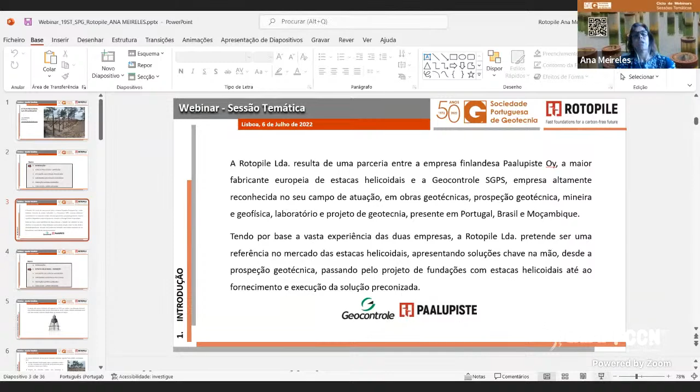Boa tarde a todos. A Rotopile é uma empresa que resulta da parceria desta empresa finlandesa, de onde são oriundos o Tero e o Ilkka, da Paalupiste, que é a maior fabricante europeia de estacas helicoidais, e da Geocontrole SGPS, uma empresa altamente reconhecida no seu campo de atuação em obras de geotecnia, prospecção geotécnica, mineira e geofísica, tal como laboratório e projetos de geotecnia, presente em Portugal, Brasil e Moçambique.

Tendo por base a experiência destas duas empresas, a Rotopile pretende ser uma referência no mercado das estacas helicoidais, apresentando a solução chave na mão, desde a prospecção geotécnica, passando pelo projeto, até à sua execução, fabricação e execução do projeto. Neste momento estamos em fase de estudo para uma fábrica, ter uma fábrica aqui perto de Lisboa, que depois nos vai fornecer um material não só para Portugal, como para a Europa ou outras zonas.

Começamos por fazer a definição mais ou menos do que é uma estaca helicoidal. A estaca helicoidal foi patenteada em 1833 em Londres pelo Alexander Mitchell, cuja primeira utilização foi feita para a amarração dos navios, e a primeira construção foi feita para o farol de Maplin Sands, no estuário do Tamisa. Portanto, isto não é uma tecnologia nova, é nova ou desconhecida aqui em Portugal, mas é uma tecnologia já bastante antiga.

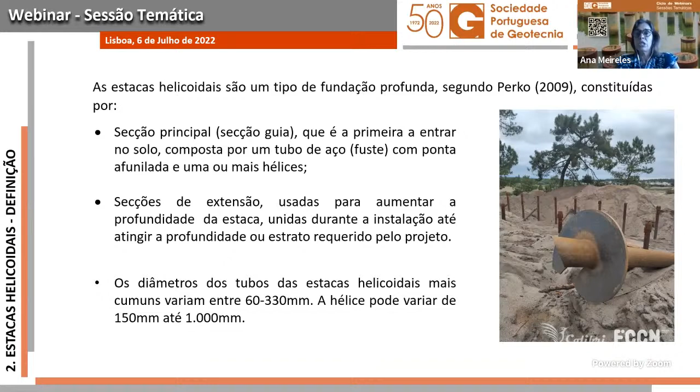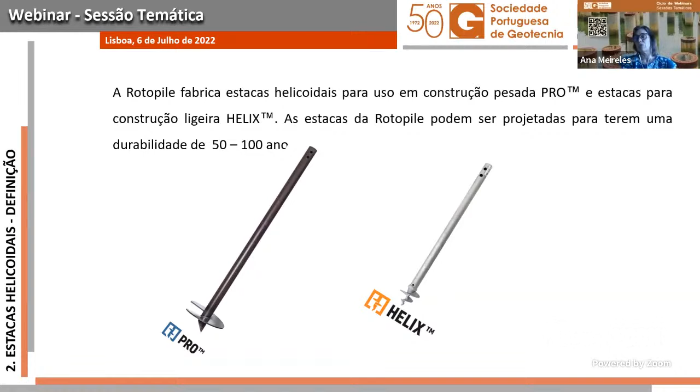A Rotopile fabrica 2 tipos de estacas: as estacas para a construção pesada, que são as tipo Pro, e as estacas para a construção ligeira, que são as tipo Helix, como temos o exemplo nestas duas fotografias. As estacas da Rotopile podem ser projetadas para terem uma durabilidade entre 50 a 100 anos, conforme exija o projeto.

No que toca às aplicações das estacas helicoidais, estas podem resistir a cargas à compressão, à tração ou laterais, e podem ser inclusivamente instaladas em qualquer ângulo para melhorar a sua capacidade de carga nas cargas inclinadas, e podem ser utilizadas com mais frequência em pequenas construções, como terraços, vedações, portões, escadas, docas, casas pequenas, garagens, painéis solares, passadiços e sinais de trânsito. Em grandes construções temos o caso, por exemplo, de casas, pavilhões desportivos, postes de alta tensão, barreiras sonoras, pontes, pórticos, mupis, coberturas insufláveis e lajes de betão, na fundação e no reforço das lajes de betão.

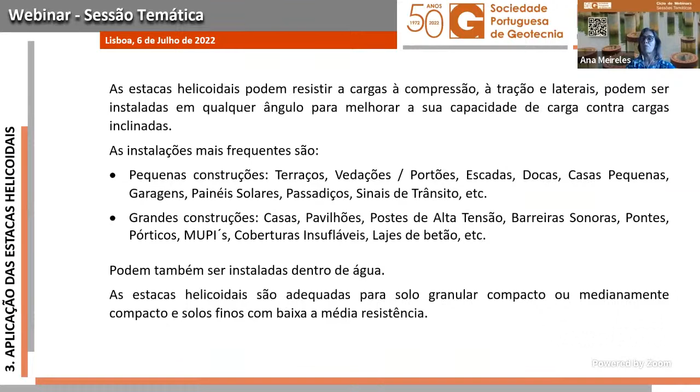Podem também ser instaladas dentro d'água, e as estacas helicoidais são adequadas, na sua maioria das vezes, para solos granulares compactos ou medianamente compactos e solos finos com baixa a média resistência.

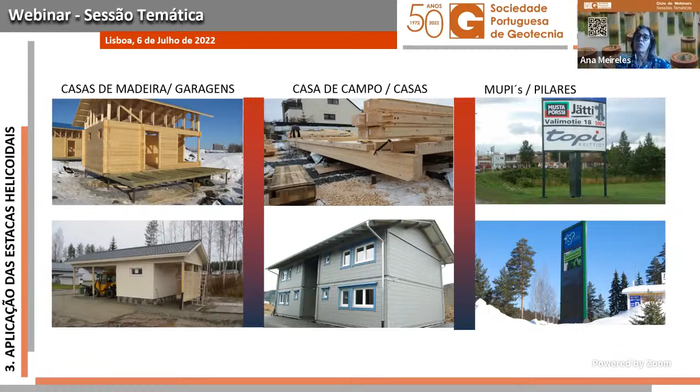As casas de madeira e garagens, casas de campo, casas com mais do que um piso, inclusivamente num seminário que houve aqui há uns meses no Canadá, uma das apresentações que foi feita foi na construção de um edifício com cerca de 20 andares, uns mupis e pilares.

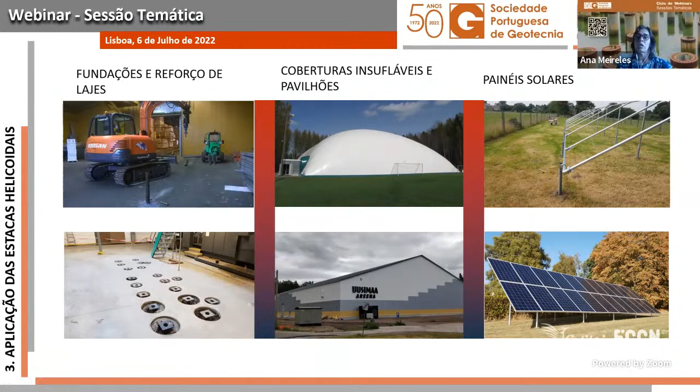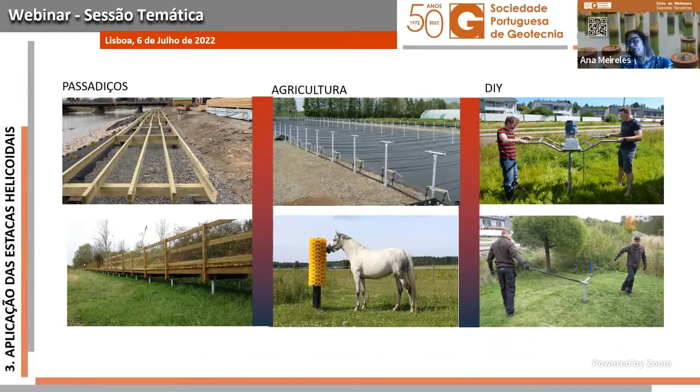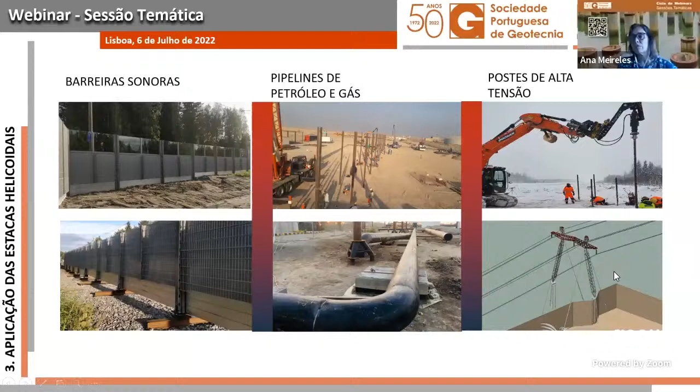As vantagens que nós conseguimos obter com este tipo de solução é a capacidade de carga, que pode ser estimada por meio da correlação entre o torque de instalação, e que é confirmado à medida que nós executamos a estaca. Portanto, à medida que nós estamos a executar a estaca, nós estamos a poder confirmar pelos dados que os manómetros nos dão, de que realmente estamos a chegar ao nível que pretendemos.

Podem ser removidas para aplicações temporárias e, inclusivamente, reaproveitadas. Se não forem reaproveitadas para outra obra, podem ser recicladas. São mais fáceis de serem transportadas para locais de difícil acesso, podem ser instaladas em terrenos com um elevado nível freático sem haver necessidade de se fazer um rebaixamento do mesmo, e aqui temos uma boa relação custo-benefício, já que a rapidez de execução é bastante grande. Não se utiliza caldas de cimento para injetar, podendo utilizar, mas a utilização básica é realmente não ser necessária a utilização de caldas de cimento nem betão.

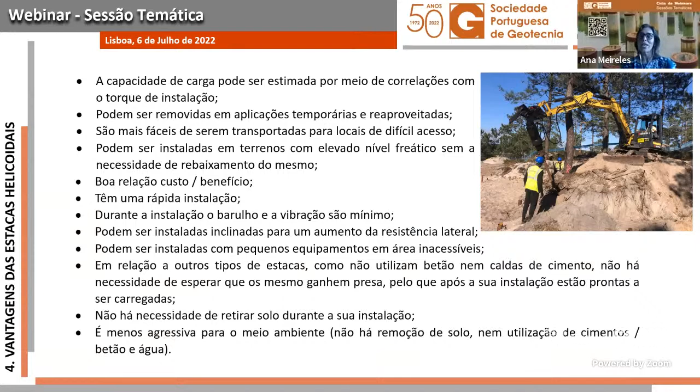No que diz respeito à proteção contra a corrosão, não há uma norma europeia específica para as estacas helicoidais, mas usam-se normas como a NP EN 14.199 de 2019, de execução de obras geotécnicas para microestacas, e o Eurocódigo 3 de Design of Steel Structure, parte 5, Piling, que é a norma europeia 1993/5 de 2007.

Complementarmente a isto, utilizamos o guia das estacas helicoidais, Helical Piles - A Practical Guide to Design and Installation, de Perko, como podemos ver a capa nesta fotografia, e ainda temos como referência possivelmente a única norma que tem um anexo inteiramente dedicado às estacas helicoidais, que é a BS 8004 de 2015.

Mas no que se refere à durabilidade, esta norma encaminha na mesma para a norma EN 1993/5 de 2007.

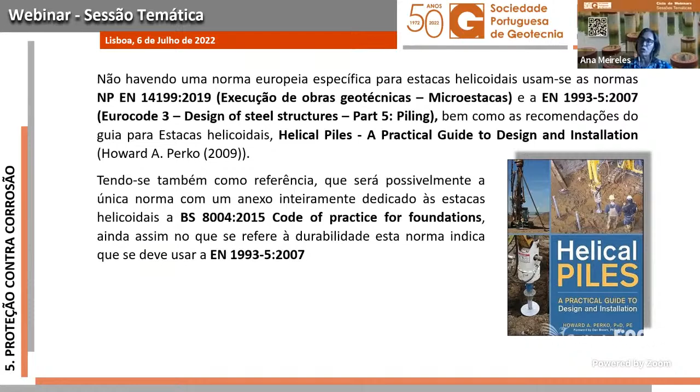Portanto, de acordo com a norma NP EN 14.199 de 2019, o elemento de proteção contra a corrosão dos elementos em aço das microestacas deve ter em conta a agressividade do meio, a água subterrânea, o solo, as correntes parasitas, o tipo de microestaca, o tipo de carga, se há tração ou compressão, o tipo de aço e a vida útil para que deve ser projetado.

Portanto, a estrutura tem uma vida útil e as fundações devem, portanto, seguir essa premissa. A proteção contra a corrosão deve consistir num eficiente recobrimento com calda, argamassa ou betão, e aqui é muito importante dizer, ou numa espessura de aço de sacrifício para a corrosão, ou precauções específicas.

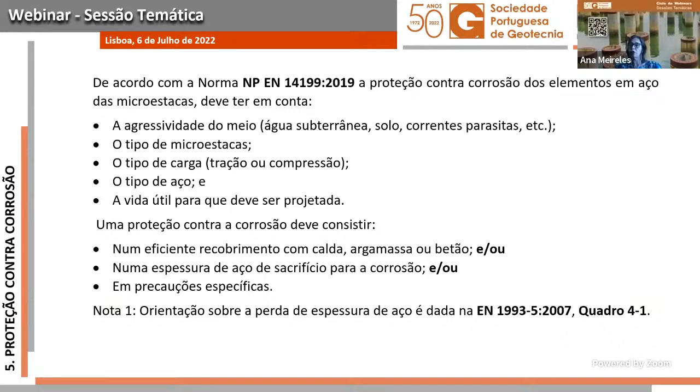A nota 1 nesta norma diz que a orientação sobre a perda de espessura do aço é dada pela norma 1993/5 de 2007, no quadro 4.1, a que já referi anteriormente, e a nota 2 diz que se podem especificar precauções acrescidas: a utilização de cimentos especiais, a utilização do tipo de aço adequado, a utilização de colunas de revestimento permanente ou encamisamento e a utilização de revestimentos de superfície.

Como eu já tinha dito anteriormente, a norma que vamos utilizar para cumprir com os requisitos da proteção contra a corrosão será a norma 1993/5 de 2007, que nos vai dar a referência quanto à perda de espessura do aço devido à corrosão, de acordo com os seguintes quadros que aqui estão explicitados. Aqui está o título dos quadros.

No quadro 4.1 está o valor recomendado para a perda de espessura em milímetros devido à corrosão para as estacas e estacas prancha em solo, com ou sem água subterrânea, e no quadro 4.2 o valor recomendado para a perda de espessura em milímetros devido à corrosão para estacas e estacas prancha em água doce ou salgada.

No caso do quadro 4.1, que é em solos, com água ou sem água, conseguimos perceber que, por exemplo, se tivermos um projeto que tem que ter uma durabilidade de 100 anos, a nossa estaca helicoidal, se for instalada num solo natural não perturbado - areia, argila, lodo ou xisto - o tubo terá que ter uma subespessura de 1,2 milímetros. Esta subespessura aplica-se também à hélice.

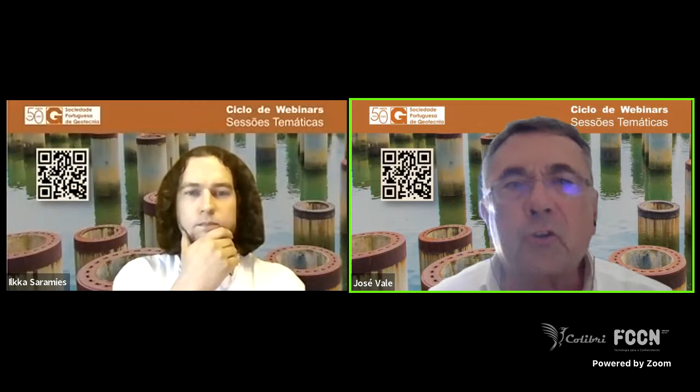Boa tarde a todos. My name is Ilkka Saramies and I am the Chief Engineer of Rotopile and Paalupiste. And I will tell you a little bit about the sizing and designing of the piles.

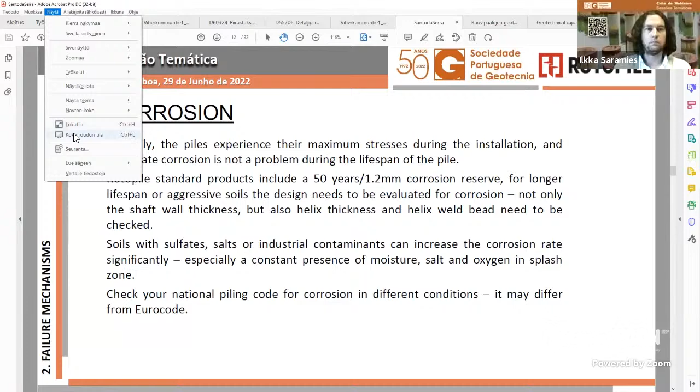So, the basic design principles for helical piles are pretty much the same as they are for any steel piles. The capacity of the screw piles consists of three components: cone resistance, shaft resistance, and the soil cylinder resistance between the helices. The cone resistance and the shaft resistance are calculated almost exactly the same as in any type of steel piles. And the screw pile is considered to be a displacing pile.

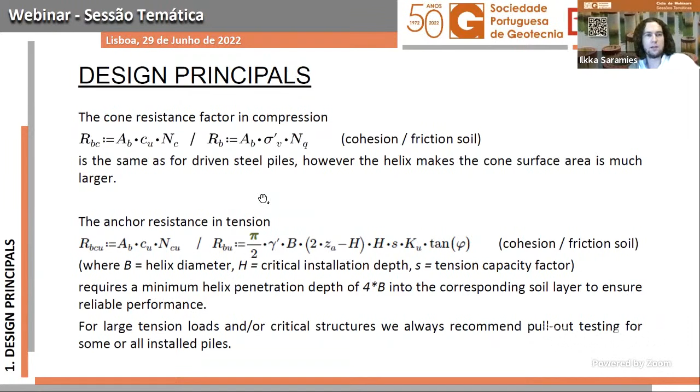And it's good to know that in friction soils, adding helices will typically not give any mentionable extra capacity, but for stiff cohesion soils, the effect of multiple helices can be quite significant.

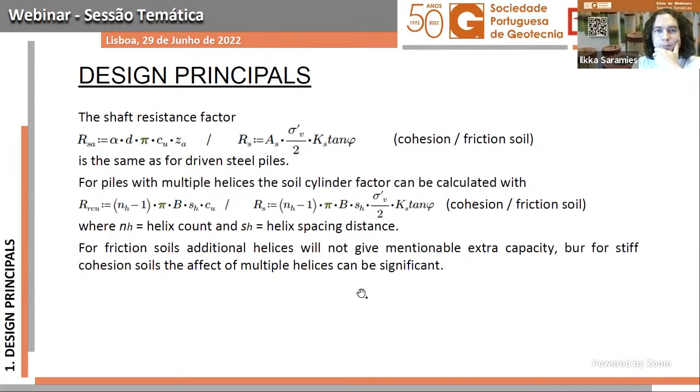And for lateral loads, the same principles apply as in steel piles. In reality, the helix increases the lateral stiffness and the rigidity of the pile by a factor of 1.2 to 1.5. But typically we do not take this into consideration because the calculations are quite difficult to do analytically. So we just use the same principles as we do for any steel pile.

And in some cases, the lateral loads can be constant in direction. So installing a pile in an angle can be taken into consideration for possible solutions. And this is something you typically cannot do with other types of steel piles or other types of piles. So the screw piles can be basically installed in any angle or any orientation you wish.

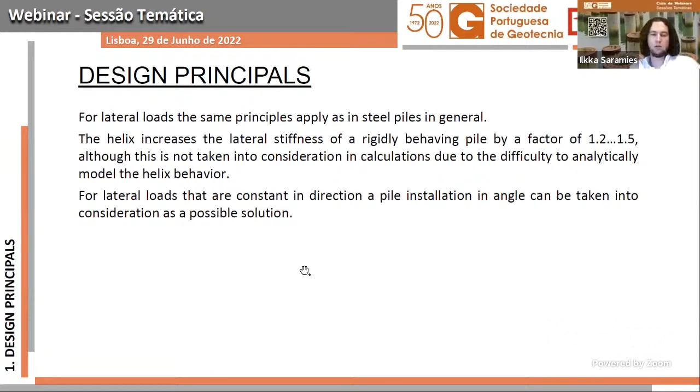So the failure mechanisms are, some of them, similar or the same as in any driven steel piles. And there are some extra failure mechanisms with helical piles that you have to take into consideration when designing a foundation. So the basic failure mechanisms are geotechnical failure, buckling of the pile, failure due to corrosion, failure of the fixture that's between the pile and the structure, and failure due to incorrect installation.

And this is something that can occur when inexperienced installers are doing a difficult project, but this is typically not a problem. And if you ever want to design custom-sized helical piles, then there are additional failure mechanisms that need to be considered: helix weld failure, helix bending, and pile failure during installation. All the standard products of Rotopile have already been sized against helix weld failure and helix bending. So this is something you do not need to consider if you use the standard sized piles.

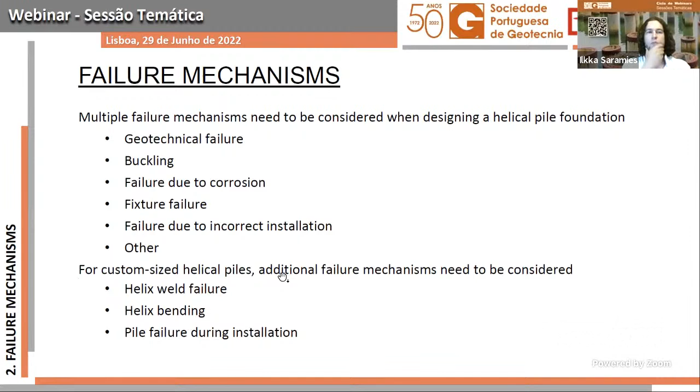So geotechnical failure can occur due to several reasons, most commonly inaccurate soil examination results, unexpected soil environment or variations in soil, or of course mistakes in calculation. But the risk of failure can be minimized by quality control of installations. So most importantly, accurate and sufficient documentation of the piling, and measuring of the installation torque. And this is something that differs a little bit from driven steel piles.

So the pile capacity, the geotechnical capacity, and installation torque correlate. So for each pile size, we can calculate the correlation factor, and during installation we can measure the installation pressure that correlates to the installation torque. And with this installation torque, we can do quality control and predict and estimate the geotechnical capacity of the pile.

Load tests are like a sure way or guaranteed way to test installation. So we can do compression load tests, and for anchors we can also do pull-out tests. And sometimes we use pull-out tests to estimate the compression capacity of the pile, because the tension capacity and the compression capacity of the helical pile correlate quite nicely. So if we measure the pull-out test capacity, then we can estimate the compression capacity of the pile.

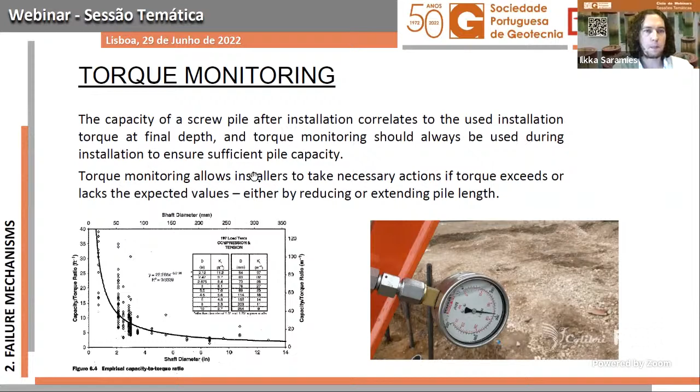So pile buckling as a failure mechanism is taken into consideration in soils, but typically this comes only into consideration when the soil is really soft, less than 10 kilopascals in shear strength. And we have had some projects that are specifically designed against buckling due to very difficult environment or very difficult soil. For example, the high tension line we installed 2 years ago was specifically difficult due to this failure mechanism, but we managed to find a suitable and viable solution for this project.

The pile buckling risk can be controlled by increasing the shaft diameter, shaft wall thickness, or with concrete filling the shaft. But if you use the standard size piles for the Rotopile, this is rarely a problem. So only if the topsoil is very soft, the loads are high and the bearing soil is quite hard, so that you get large capacities for a thin or slim pile, then pile buckling can be a factor. And the buckling analysis is exactly the same as in any steel piles, so it comes directly from Eurocode.

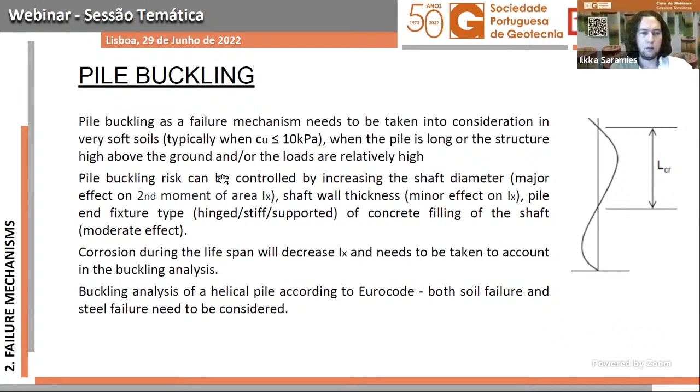Corrosion is typically not a problem in Northern Europe; only in some very aggressive soils can corrosion be a sizing factor. The Rotopile standard products include a 50-year or 1.2 millimeter corrosion reserve. So when we give table values for pile capacities, they already include the 1.2 millimeter corrosion reserve. So only if you have a high corrosion environment do you need to take corrosion into consideration and do the needed calculations for corrosion.

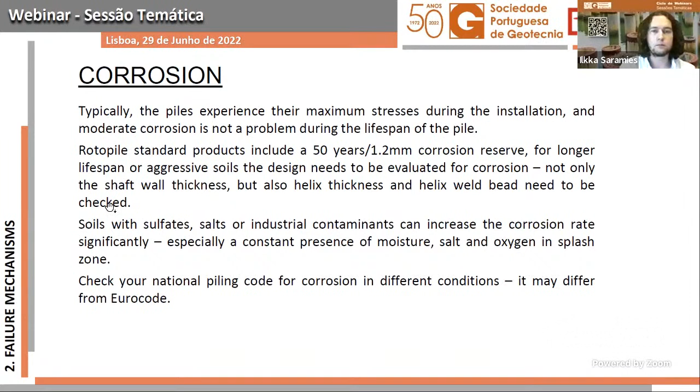For high corrosion environments, we can provide custom-sized piles that have a thicker shaft and thicker helices. And also the weld beads need to be a little bit thicker for this environment. Specifically, soils with sulfates, salts, or industrial contaminants can increase the corrosion rate significantly. And these are the corrosion values found in Eurocode. In your national codification you may have some different values, but these are pretty much the European standard values.

So, one failure mechanism you need to take into consideration for custom size piles is the helix bending and weld bead failure. The helix is welded to the pile shaft, and in case of a slim pile and large helix, if you are, for example, trying to get large geotechnical capacities from a soft soil, it may be beneficial to use quite a large helix. And if you use a custom-sized helix, you need to take into consideration the possibility that the helix weld bead or the helix becomes a sizing factor.

So for custom sized piles, the helix failure risk can be controlled by increasing the helix plate thickness or the weld thickness, or both. If you increase the shaft diameter, you will reduce the bending moment at the base of the helix, and this will also increase the weld bead length. So you both reduce the stress and increase the capacity of the weld.

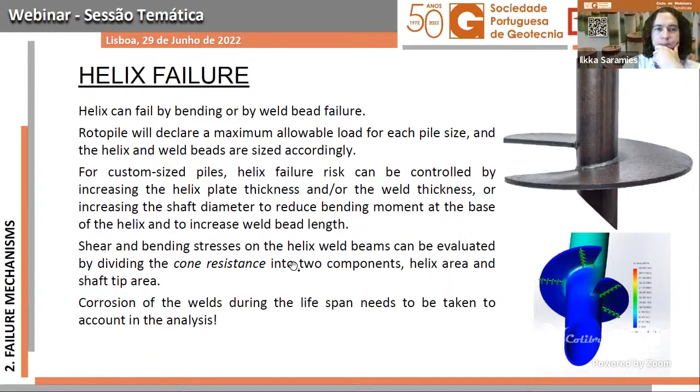Also, piles can shear during installation if you exceed the maximum torque capacity of the shaft or the torque capacity of the torque bits. For standard products, we declare a maximum allowable installation torque for each pile size, and you should not exceed this torque during installation. The maximum torque also gives a limit value for the maximum capacity of the pile, because the installation torque and the geotechnical capacity of the pile correlate. So by limiting the maximum installation torque, you are also limiting the maximum geotechnical capacity of the pile.

So when designing the installation, you either have to select a torque drill that is not too big for the specific pile size, or you can limit the maximum hydraulic pressure. And if you bend the pile during installation, this will add stress to the pile shaft and increase the risk of shearing. So always make sure that the pile is not bent during the installation.

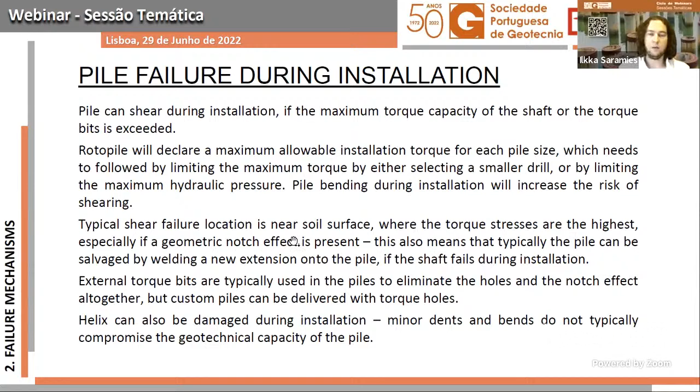So, pile selection process. Things that you need to consider when selecting the right pile for the project are first of all the load and pile size, because like I said earlier, the capacity of the pile and the installation torque of the pile correlate by a capacity torque factor. So with the maximum installation torque, you can only get as much geotechnical capacity as the torque allows.

Also, the installation and transportation equipment usually define the maximum length of the pile. So if you use a standard size excavator, let's say an 8-ton or 12-ton excavator, the typical installation length is 4 to 6 meters with the standard boom. So these are usually the most economical pile lengths for the project. And also for transportation, it's not always possible to transport long piles onto the site, so you also have to take transportation into consideration.

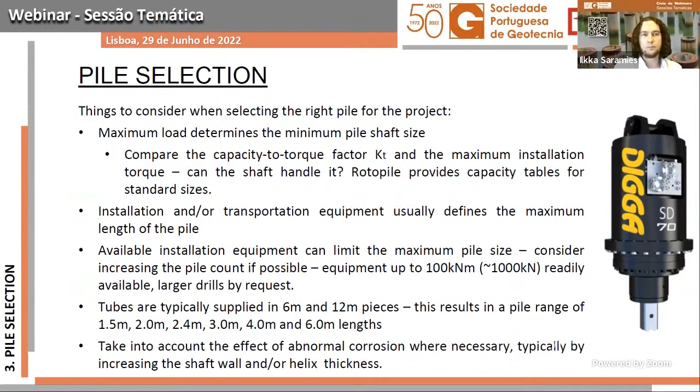And some more things you need to consider when selecting a pile for the project: always try to use common sizes for all projects, unless it's economically well-founded due to a large pile count or other project-specific reasons. And the use of multiple helix piles is typically only justified in cohesive soils. So I would say more than 90% of the piles we install and supply are with one helix.

Although for larger piles, we can use a smaller guiding helix. So we actually use a small helix at the tip of the pile to decrease placing deviation and increase penetration into the soil. And above that, we use a larger helix that is actually the bearing helix, and we calculate the bearing capacity with the larger helix. It is possible to do hot dip galvanization, but it's rarely economically viable, and typically the most viable solution is just to increase the shaft wall thickness and the helix thickness.

And we have also installed geothermal collectors into these piles, and you can expect to get 20 to 30 watts of geothermal heat for each pile meter. So for, let's say, a domestic house with 500 meters of pile, you can easily get 10 kilowatts of heating power just by installing geothermal collectors into the pile.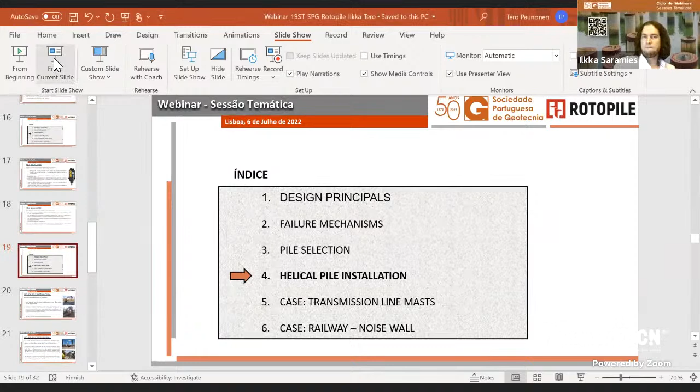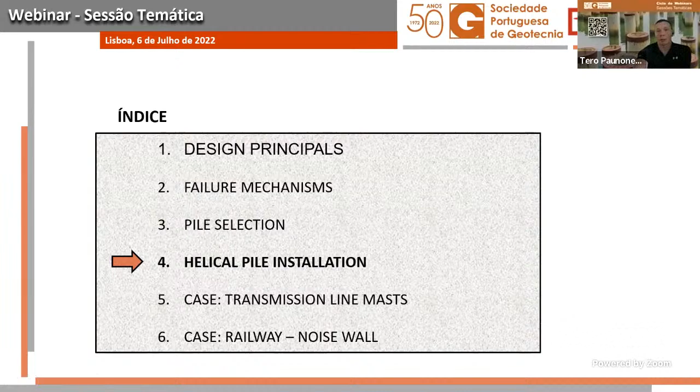So yeah, I'm Tero Paunonen. I've been working at Paalupiste the last 20 years in different kinds of tasks, also in the installation. So I'll tell you a little bit of the basic information about helical pile installation.

As you saw in Anna's video, we are using mostly excavators equipped with a drill for installation, but also front loaders, telehandlers, or truck cranes can be used as a piling machine. Actually, when we are installing 12-meter long piles, we prefer to use truck cranes because of their long reach. But as long as the machine provides a hydraulic outlet, it's possible to connect the earth drill and use that as a piling machine. But we use mostly excavators because they provide flexibility between excavation and piling work, so we can use the same machine for both.

Excavators are also quite compact sized. With them you are able to install the piles at different angles if needed, quite easily. You can drive them off-road. And one important reason is also that they are easily available around the world, which makes projects in different countries possible. For example, we have had plenty of projects in other countries where we only send the piles, the drill, and the installation team. Then we hire the local excavator and execute the work over there.

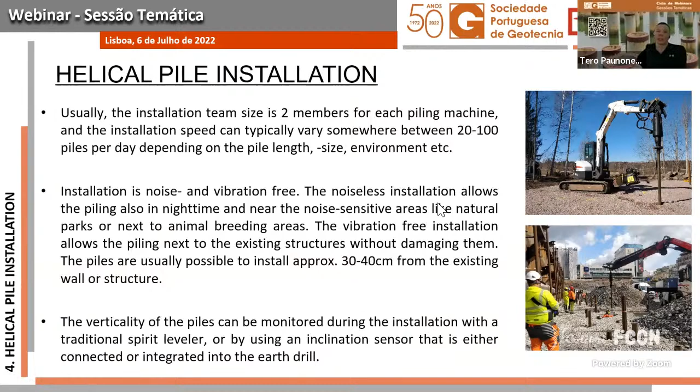During the installation, the verticality can be controlled with a traditional spirit leveler or using an inclination sensor that is connected or integrated in the earth drill. Now more and more inclination sensors are used for this purpose. For example, in this photo you can see the inclination sensor, which is actually like a visual sensor. There's an LED stripe that turns green when the drill is upright, so the pile is upright as well. And again, it turns red, this light here, once the pile is leaning at an angle. So you can very easily just visually check if the pile is straight or at an angle.

Then the height level can be measured with a rotary laser or electric altimeter. For example, ZipLevel is one of the brands, can be seen here in the photo as well. Sometimes the piles, if they can't be driven to the desired level, can be cut at the level. An angle grinder, portable bandsaw, plasma flame, or gas flame can be used for that.

After the installation, piles can be equipped with pile caps, U-brackets, or it's possible to weld almost any kind of steel frame or structure on top of the pile, but pile caps being the most common.

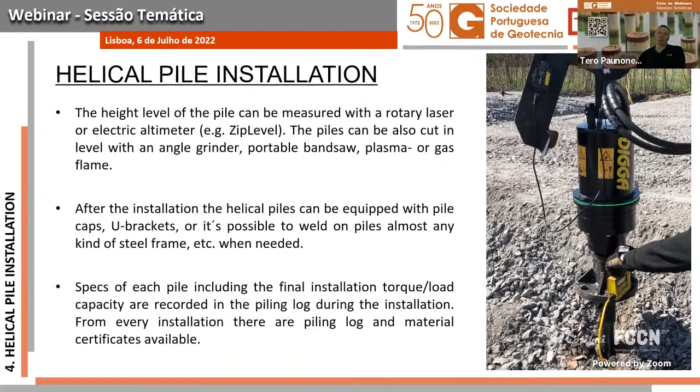Specs of each pile, including the final installation torque and load capacity, are recorded in the piling log during the installation. From every installation we provide the piling report together with the material certificates of the pile.

Here are 2 case studies. The first of them is a transmission line mast project in Northern Finland, 2021. Our work was to make foundations for a 110 kilovolt transmission line mast. The main goal for using helical piles in this project was to cut foundation costs, reduce installation time, and avoid using concrete.

You can see here the foundation for each mast leg. We used 3 piles. Also 1 pile could be used, but in this case, because of the soil, we used 3 piles. They were 168 millimeter with 8 millimeter wall.

Helical part diameter was 400 millimeters, and they were 6 meters long. Three per mast leg, and these were on the compression load.

Then again, for the guy anchors, we installed 1 pile per anchor, so total 4 piles. They were installed at an angle, so they were a little bit longer than the mast leg piles, being 8 meters long. These piles were 140 millimeter diameter, 10 millimeter wall thickness, and had 2 helical parts, 300 millimeter and 500 millimeter.

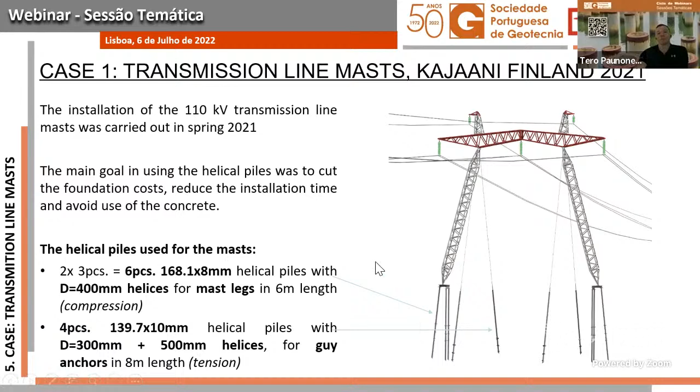The loads for the mast legs were 330 kilonewtons per leg, the compression loads, and for the guy anchors it was about 150 kilonewtons per anchor, and that was a tension load.

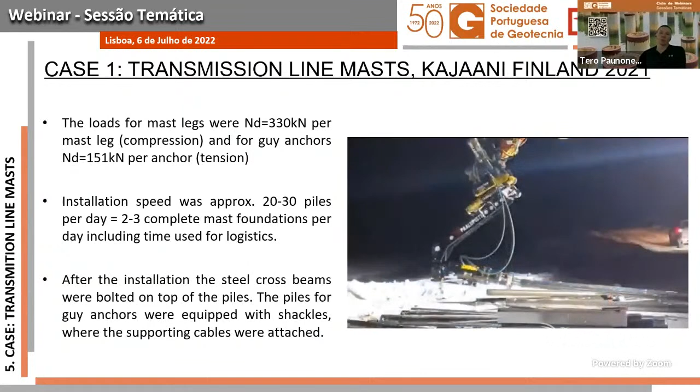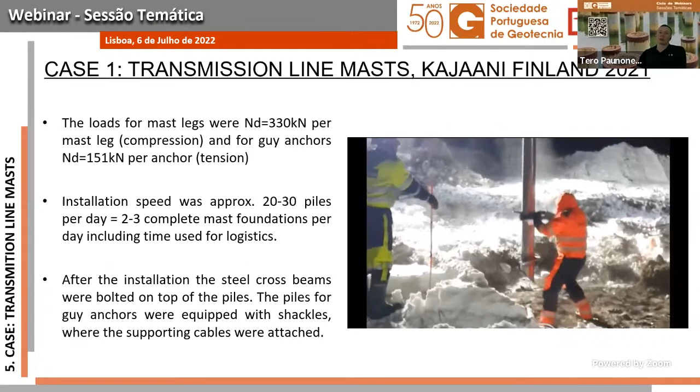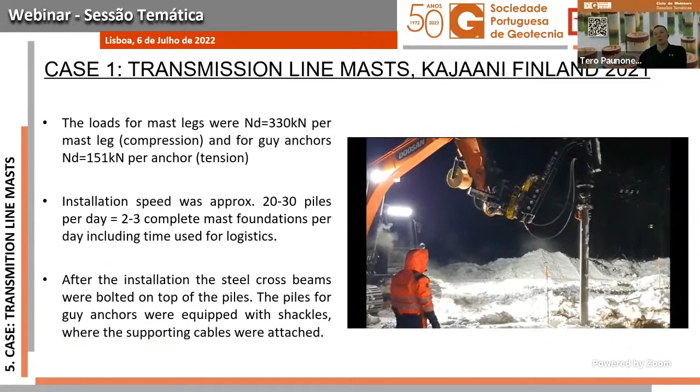We were able to install about 20 to 30 piles per day, which meant 2 to 3 complete mast foundations per day, including the time used for logistics. And that was a great improvement over the traditional foundation method, when up to now they've only been able to make 1 foundation per day.

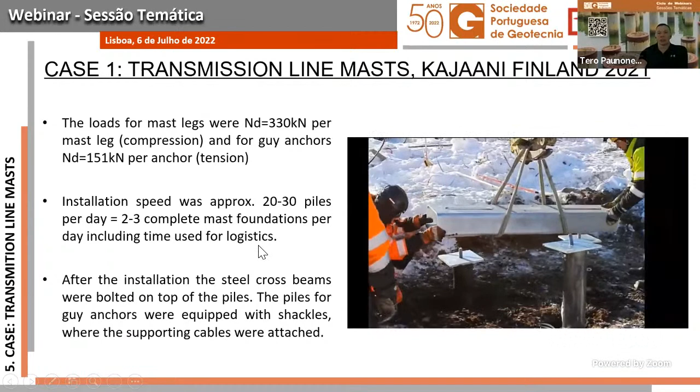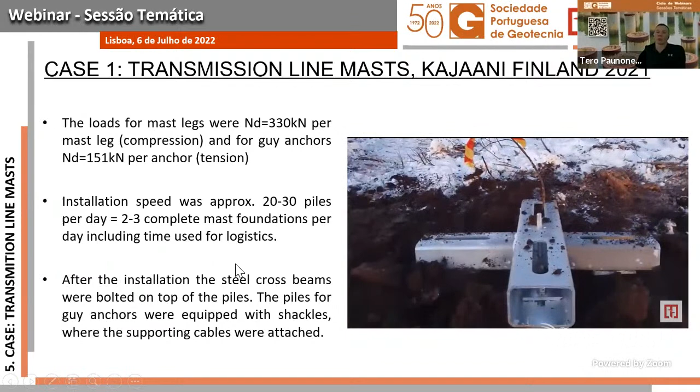Here in the video you can see how the steel cross beams were bolted on top of the piles for the mast legs, and the piles for the guy anchors were simply equipped with shackles where the cables were attached.

So yeah, here you can see the photo of the end result.

And the benefits. What we gained using the helical piles in this project was 3 times faster installation time, and more accurate load-bearing capacity data compared to traditional wooden piles.

With the wooden piles, you don't get that precise data of the loads.

Then there was a possibility to use the same excavator for both piling and the earthworks, which made the installation faster and more cost efficient.

And the total savings were about 35% compared to the traditional foundation method, which was wooden piles together with concrete.

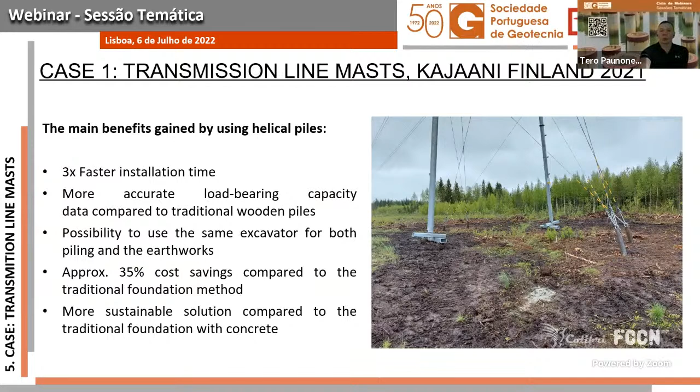And this solution was also more sustainable compared to the traditional foundation with concrete. So we were able to get a lower carbon footprint as well.

Then another case study is from railways. It's a railway noise wall. This work we did in summer 2018, June and July, in Tampere, Finland. There were actually 2 different noise walls: one was 3 meters high, and the other was a low noise wall, just 1.2 meters high. The project owner was the Finnish transport infrastructure agency.

The main goal in this project was to avoid large excavation works, avoid use of concrete, and be able to work faster during traffic stops.

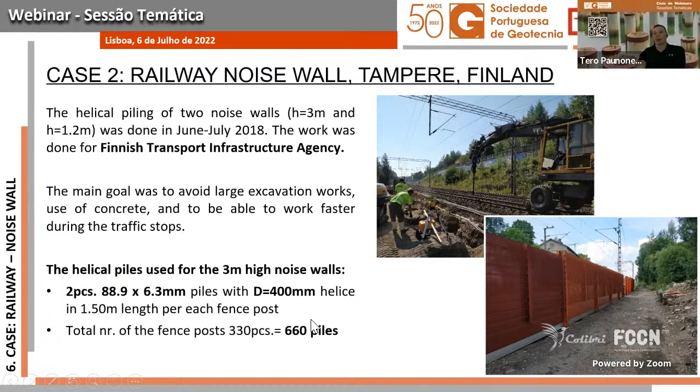For this 3-meter high noise wall, we used a 2-pile solution. We installed two 90mm piles with a 400mm helical part, and those piles were only 1.5 meters long, quite short. As there were 330 fence posts, the total pile count was 660 piles.

Now why did we use two smaller piles instead of one large pile? The main reason was that this way we were able to save quite a large amount of material, because the alternative pile would have been a 219mm pile, which of course would be installed in the middle, but instead we installed two smaller piles.

One in front of the fence line and one behind the fence line. And because we were working on the railways, those who have worked there know there are height restrictions because of the electric lines, but because the piles were that short, we didn't have any problems with the height in this case.

It was also possible to use smaller and more agile equipment for the logistics and installation. And this 2-pile solution also allowed greater tolerances for pile installation accuracy, which transferred to faster installation.

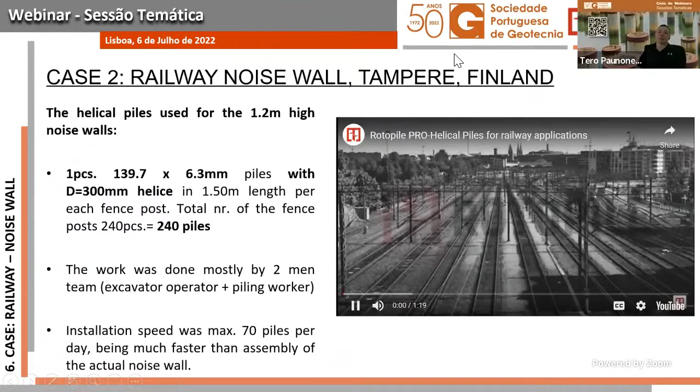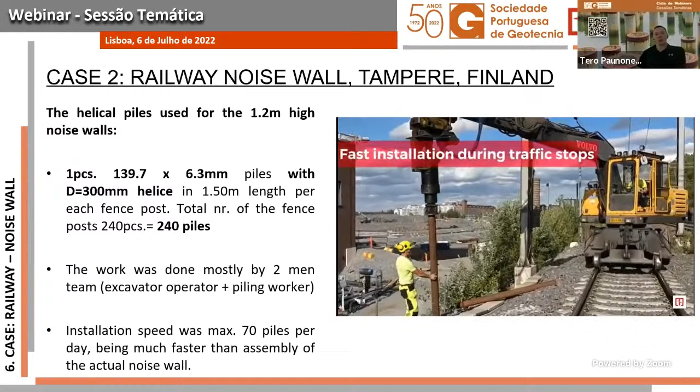And for this lower noise wall, we used one single pile straight under the fence post. That was a 140mm pile with a 300mm helix, again 1.5 meters long, and the total number of piles in this project was 240.

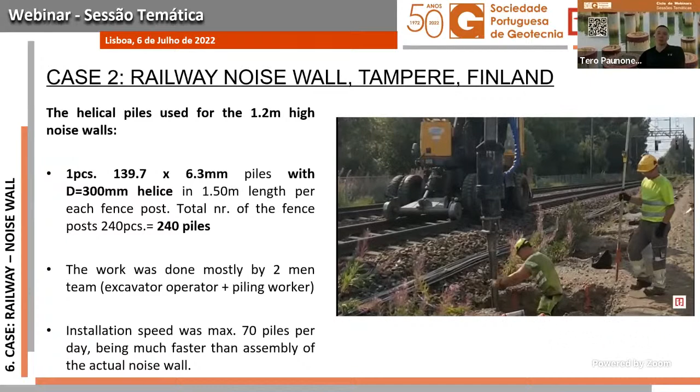So for both of these fences, the total pile count was about 900 piles.

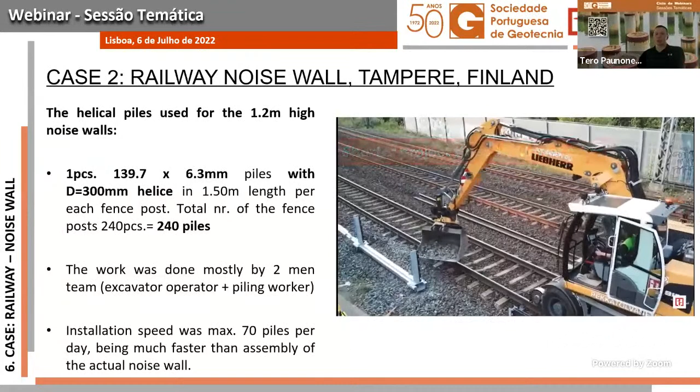The work was done mostly by a two-man team, an excavator operator and a piling worker. On the best days, we were able to install about 70 piles per day, which was much faster than the actual assembly of the noise wall itself.

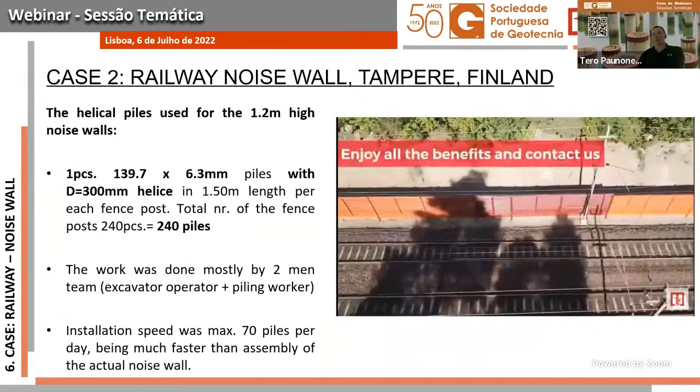But with the old foundation method, it was the opposite case — the assembly of the noise wall had been faster than the foundations, but now that was reversed.

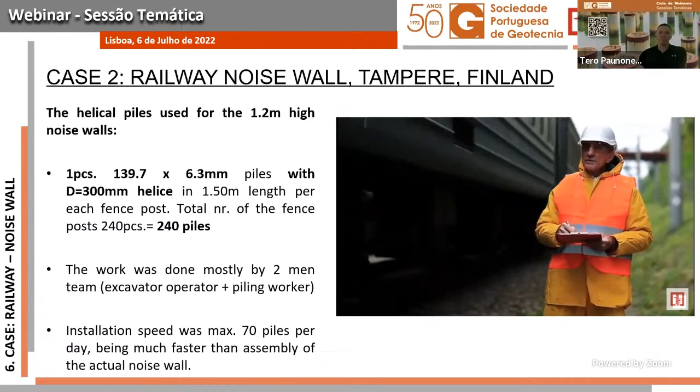The benefits we could get using helical piles in these projects were faster installation and less material used compared to large diameter steel pile foundations. That of course lowers the costs and is more environmentally friendly.

We had the possibility to work better during traffic stops. Sometimes we had very narrow time windows, just 1 to 2 hours of working time, but because the installation is that fast, that worked quite well.

There wasn't any damage on the railway; it remained undamaged. And of course, the lower total cost and smaller carbon footprint — all these benefits were gained by using the helical piles.

Obrigado pela atenção. Thank you for listening. Was that even near?

Thank you all for the presentations, which were enlightening. We have some questions from the audience. I don't know if Ana prefers some questions in Portuguese or we do all in English.

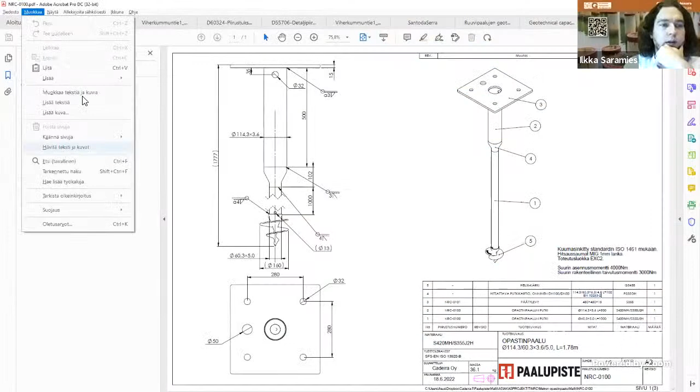So I think the question was, is it possible to change the diameter of the pile during the pile? This is one example we did just this year, a railway application for a signaling device. Here we used 2 different pile diameters for one single pile.

We used the cast iron tip, the helix tip for penetration. We did this because the site did not allow any excavator equipment, so we had to install this by hand. We had to use a small pile with good penetration, and then the top part of the pile has a larger diameter to ensure lateral rigidity of the pile.

So it is possible to use this kind of pile for light applications, no problem. But for larger loads or larger applications, it becomes more difficult to weld together different pile diameters. I think usually this would be beneficial only for lateral loads anyway. So the answer is yes, it is possible to some extent.

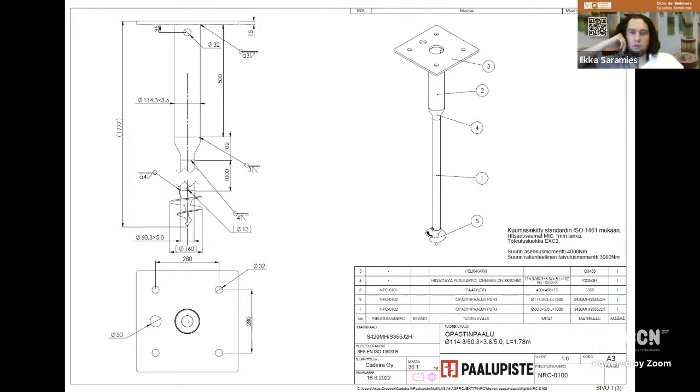So we have another question. How is it possible to guarantee that the helical pile doesn't deviate more than the allowed tolerance? Tero, will you be the one to answer this? Deviate more?

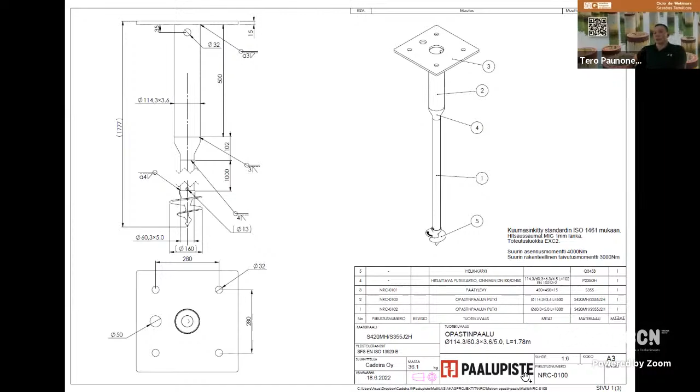It's actually more accurate than standard driven micropiles, because you are able to install the piles at an angle. Sometimes when you start to install, there might be 5 to 10 centimeter deviation in the beginning of the installation, but once you drive the pile tip first and straighten it before it gets too deep, let's say right after 1 meter depth, you are able to fix this deviation. Usually after that, the pile is so stiff in the ground that any more deviation won't happen.

But helical piles are more accurate to install than the typical driven micropiles.